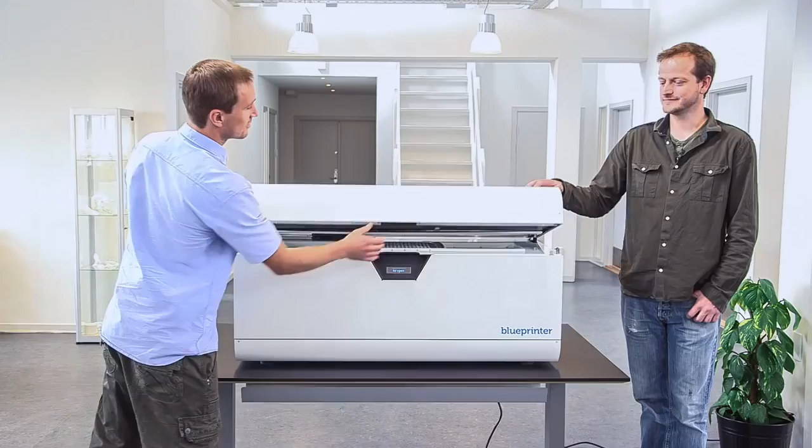This is how it looks on the inside. In the center, there's the building chamber. This is where the models are being printed. There's a display showing the status of the printer.

As you see, there's no buttons on the printer. That's because it's all controlled from a browser. If you follow me, I'll show you how it works.

You type blueprinter.local, and you'll be taken to the user interface of the printer. This is a graphical representation of the build chamber, and it's in here you control everything.

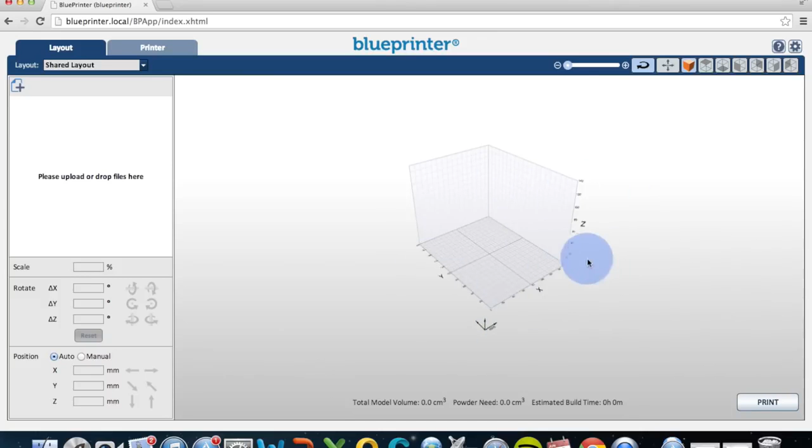We can drag in our STL models. I'm dragging a lamp design from a designer called Dissinghoff. Once you're satisfied with the layout, you simply push print, and the printer will start printing your models immediately.

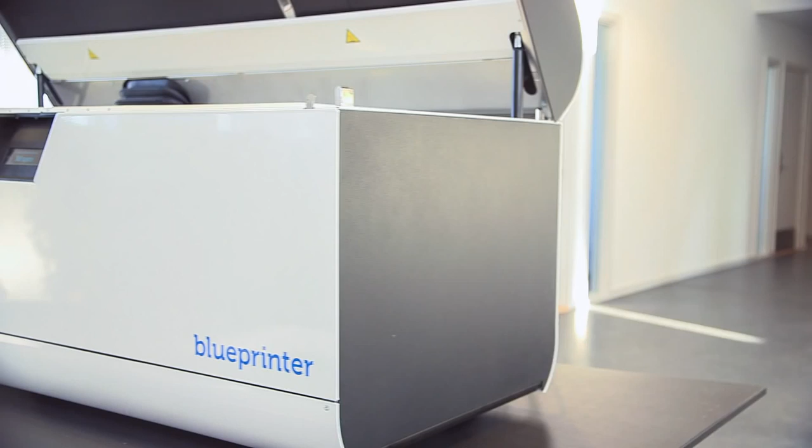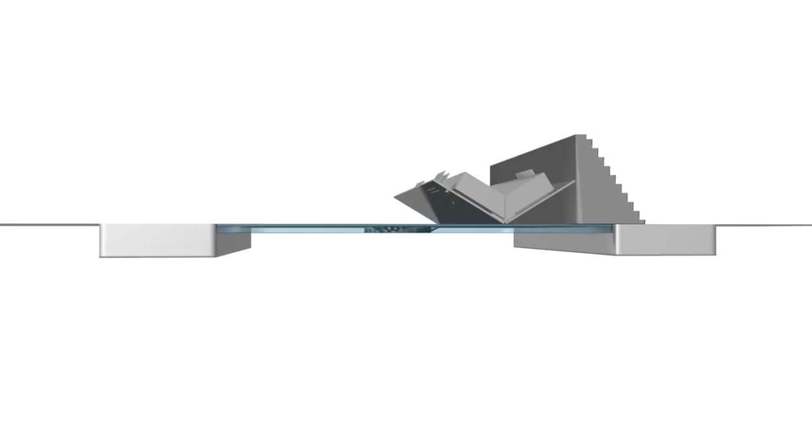What we're seeing here is a visualization of the lamp being printed. We are distributing thin layers of plastic powder and sintering the cross-section of the model. The unsintered powder acts as support for overhangs and adds stability to the structure.

Depending on how many layers your model consists of, a job can take anywhere from a few hours up to a few days.

The printing is now done, which the display will tell you. You open up the lid. The display now tells you to empty the chamber.

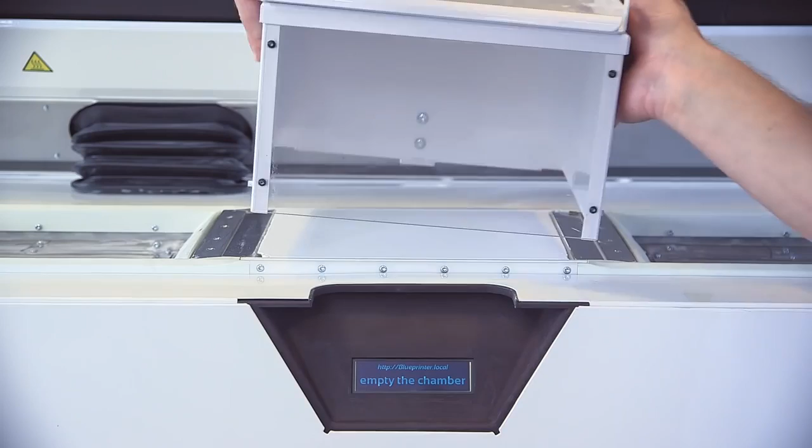You take the remover box, which is this one, place it on top of the building chamber. A short countdown will appear, and the models will be ejected into the remover.

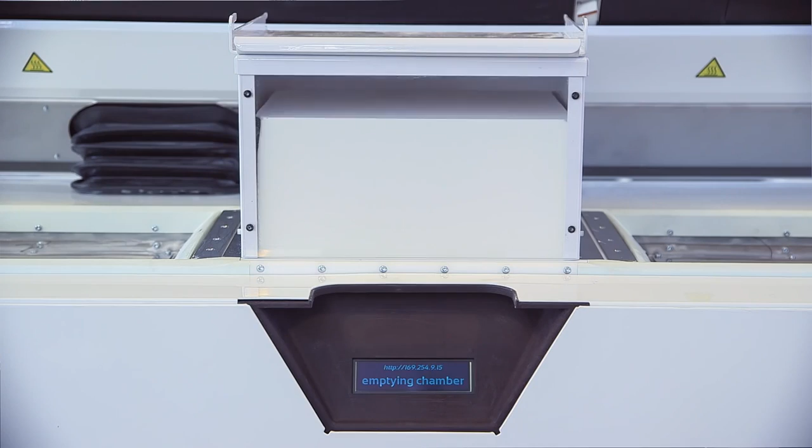When it's done, you take the bottom plate and slide it underneath the remover box and carry it to the cleaning station.

This is the build removed from the printer. This is the cleaning station. So what we do is placing the build in the cleaning station and removing the remover box. Put my arms in and I'll start cleaning.

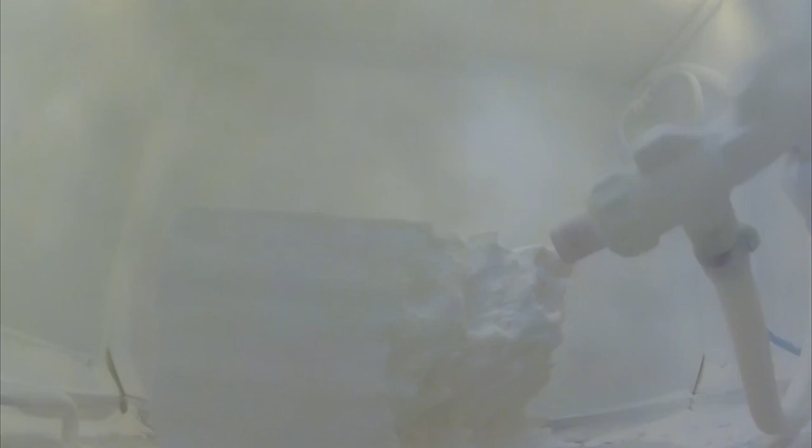Depending on the build size or the geometry, it can take anywhere from 5 minutes till 30 minutes. After you have waited for the dust to settle, you gently open the front lid and you remove the finished model. It's a good idea to rinse it in water, but except from that, it's a finished model.

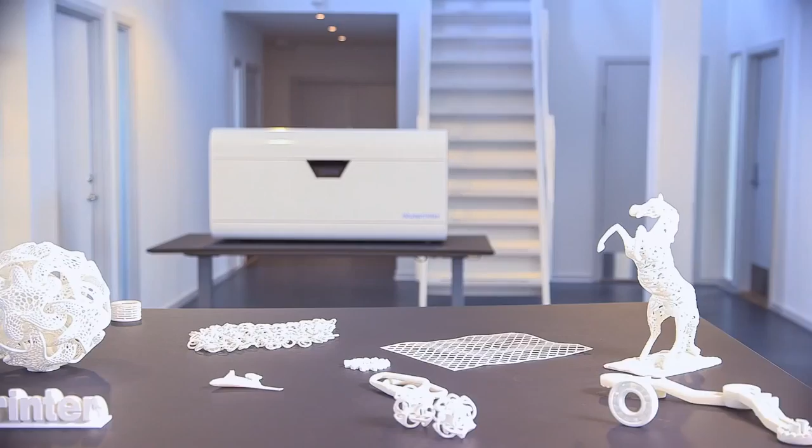This is now the finished Dissinghoff lamp. It's just been cleaned and it's ready to go. It's a very good example of a complex shape.

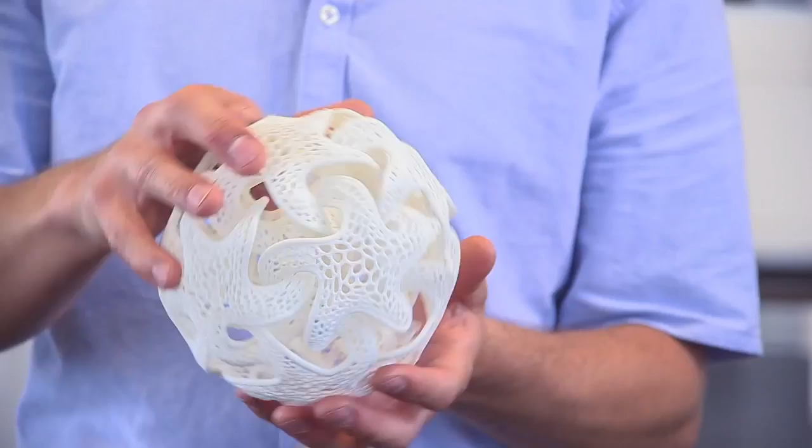You can actually use it to test the lighting, how it looks with an actual bulb in it. See if you're happy with the design, and if not, you can make another iteration of it. The Dissinghoff lamp is a great example of the freeform capabilities, and as you can see, we have other examples. Basically, there are no limits.

Another thing we would like to show you is also the flexibility of our models. We're able to produce quite flexible parts. They can be handled without any problem. I have some other examples to really show you the flexibility.

This is a simple mesh, but it's a great way to illustrate that basically we have the flexibility. It's a fully sintered plastic model that you take straight out of the printer. The last thing is, again, to show off the strength and the flexibility of the parts. Fully functional models, basically straight out of the printer.

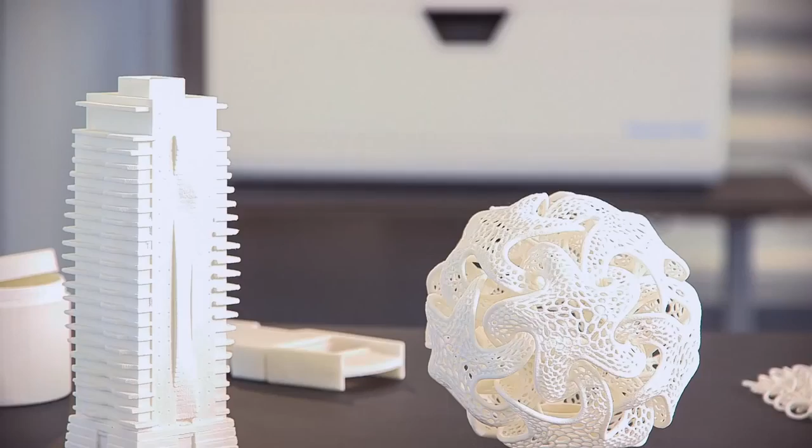We deliver easy-to-use, high-precision, strong and flexible quality models at an affordable price. And that is the Blueprinter.